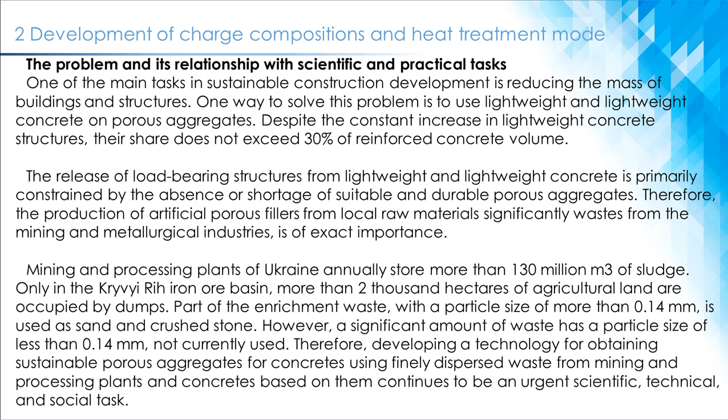Therefore, developing a technology for obtaining sustainable porous aggregates for concretes using finely dispersed waste from mining and processing plants, and concretes based on them, continues to be an urgent scientific, technical, and social task. The research aims to develop optimal compositions of new porous aggregates made from the waste of mining and processing plants and study these aggregates' properties.

The selection of the optimal composition of raw materials for the porous filler included an analysis of the influence of the charge and additives design and their granulometric composition on the final product's quality. Dry mixtures contained crushed and not crushed sludge, grains with a size of 1.25 to 0.14 millimeters; not crushed sludge with the addition of crushed shale; not crushed and crushed sludge with the addition of crushed shale; crushed sludge and crushed shale.

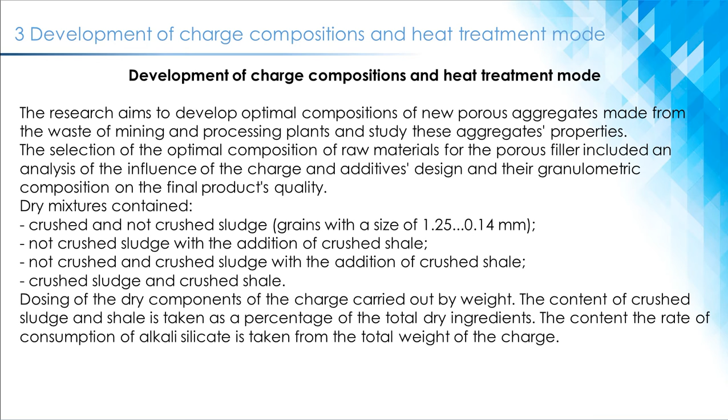Dosing of the dry components of the charge was carried out by weight. The content of crushed sludge and shale is taken as a percentage of the total dry ingredients. The rate of consumption of alkali silicate is taken from the total weight of the charge. The mixture was granulated in a disc granulator until granules with a diameter of 5-20 mm were formed. Liquid glass is fed into the pelletizer by means of a spray gun.

The molding of the raw granules was carried out at different density values of alkali silicate, 1.30 to 1.45 g/cm3, which provided the introduction of the required amount of its solid substance into the charge. This approach made it possible to reveal the pattern and nature of the influence of the consumption of alkali metal silicate on the porous filler's properties.

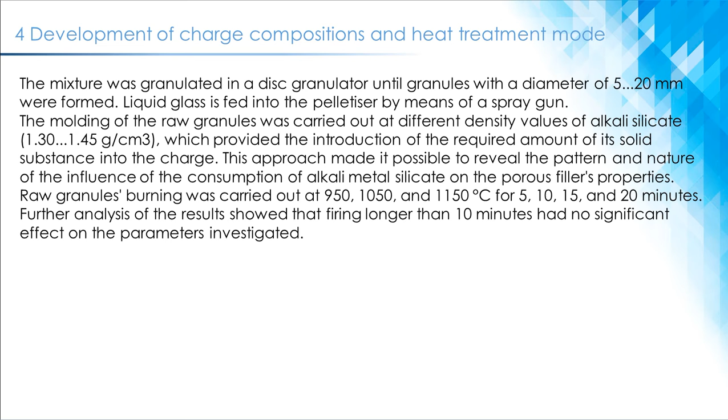Raw granules burning was carried out at 950, 1050, and 1150 degrees Celsius for 5, 10, 15, and 20 minutes. Further analysis of the results showed that firing longer than 10 minutes had no significant effect on the parameters investigated. The burnt granules testing results from a raw mixture with crushed sludge are shown in Fig. 1. The obtained results show that if alkali silicate and the amount of ground sludge in the charge increases, the average density of aggregate granules decreases.

However, it is impossible to obtain an aggregate with an average density of less than 1.5 g/cm3 due to the resulting liquid phase's small amount. The amount of the liquid phase largely depends on the content of fine particles in the mixture. The amount of ground sludge did not exceed 20%, and the larger grains did not take an active part in creating the pyroplastic melt; they dissolved only partially.

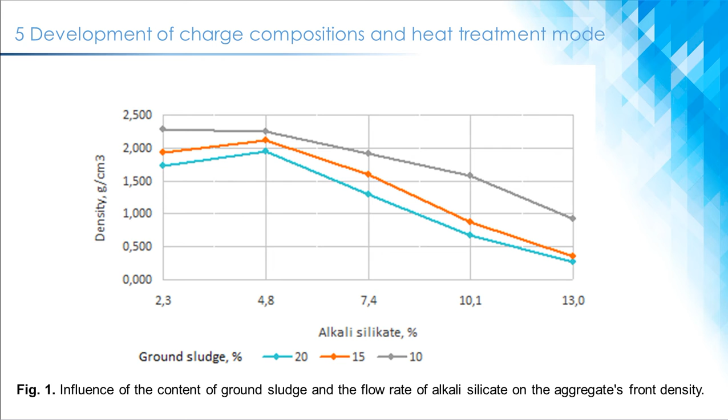Adding a part of crushed shale to the sludge made it possible to obtain an aggregate with a lower average density than in the previous case. This dependence is shown in Fig. 2. A decrease in filler granules average density with the same fraction of the crushed charge occurs due to an increase in the liquid phase amount. This is because liquid glass forms more melting eutectics with shale minerals and more intense gas evolution occurs.

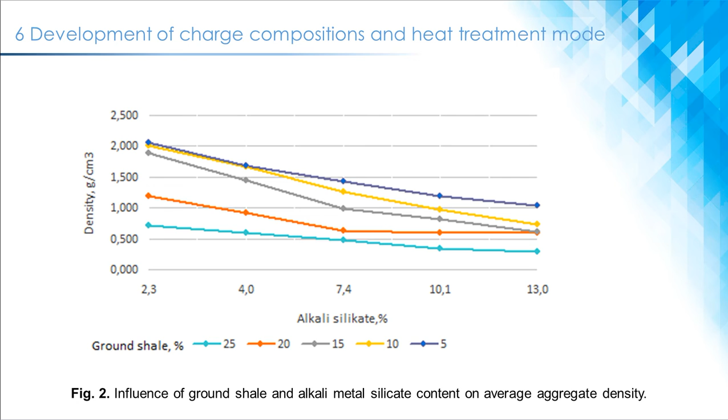Studies have been carried out on the effect of the content of crushed sludge and shale on the aggregate average density. These studies' results are shown in Fig. 3 and show that aggregate granules average density decreases almost linearly with increasing alkali silicate consumption. However, with a 20% content of crushed sludge and shale and alkali silicate consumption of more than 10%, an increase in aggregate granules average density is observed.

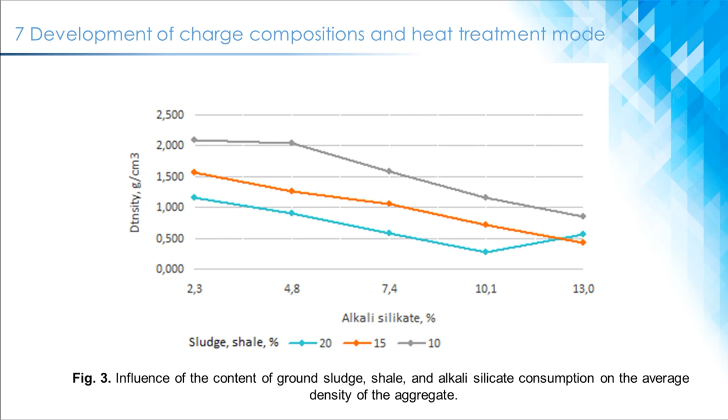This is explained by a decrease in the melt's viscosity and the process of compaction, rather than porization. The combined effect of the milled components on the aggregate granules average density is greater than that of each separately. Previous studies have shown that using a mixture containing unmilled sludge and shale results in low-strength granules with low porosity and high average density. Therefore, all further studies were carried out only on mixtures with ground components.

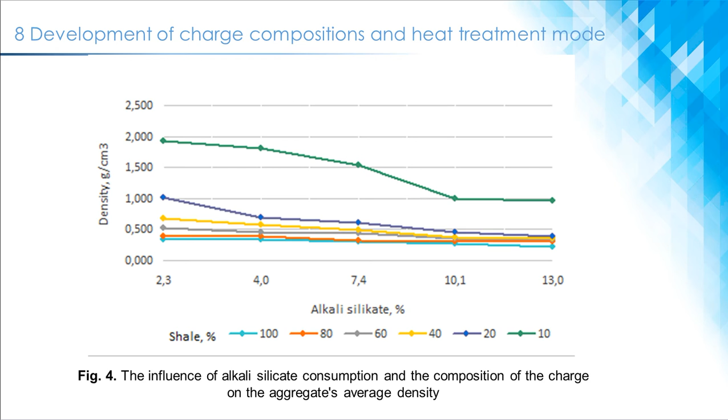The results are shown in figures 4 and 5. Dependencies show that the most intensive decrease in average density occurs when there is up to 40% shale in the charge. A further increase in the shale amount reduces the average density slightly, but the granule strength sharply decreases, and the pores increase due to increased gas release.

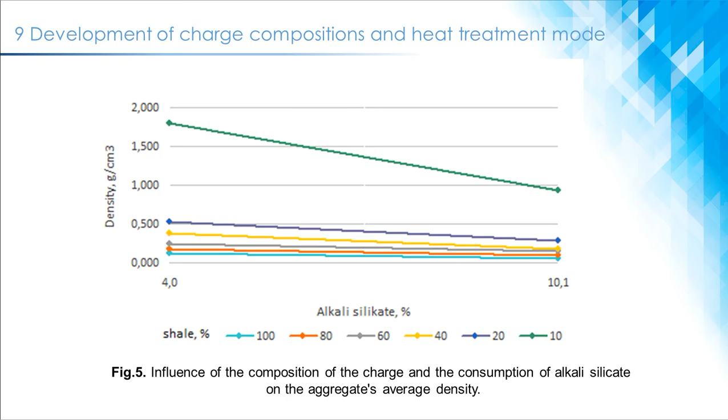Intense and excessive release of gaseous products does not improve the porization process but causes the formation of large interconnected pores, passing into cavities and open pores. Since previous studies have established that the most suitable for obtaining a porous aggregate is a crude mixture consisting of crushed sludge, crushed shale, and water glass, these mixtures have been used to study the influence of technological factors on the properties of the porous aggregate.

The research objective is to obtain mathematical models expressing the aggregate's average density and strength on the leading technological factors. The mathematical planning method, followed by mathematical and statistical processing of the results, was used to reduce the number of experiments. A three-factor experiment at 2 levels is planned in work. The variables are x1, the content of ground shale as % of the total mass of dry components, x2, consumption of liquid glass as % of the total mass of the charge, and firing temperature.

Since firing for more than 10 minutes did not significantly affect the parameters under study, firing the granules was 10 minutes and not taken as a variable. The levels and intervals of variation of the selected factors are shown in Table 1. After statistical analysis, the equations have the following form. When checking the suitability of the above equations by Fisher's criterion, they all became adequate.

Analysis of equations 1 and 2 shows that within the limits of variation of the variables, the burning temperature and shale consumption have the most significant effect on the average density of the aggregate, and the effect of the burning temperature is 6 times greater than the consumption of shale. As the burning temperature and the alkali silicate consumption increase, the strength of the aggregate decreases. Figures 6 and 7 show a graphical interpretation of the obtained dependencies.

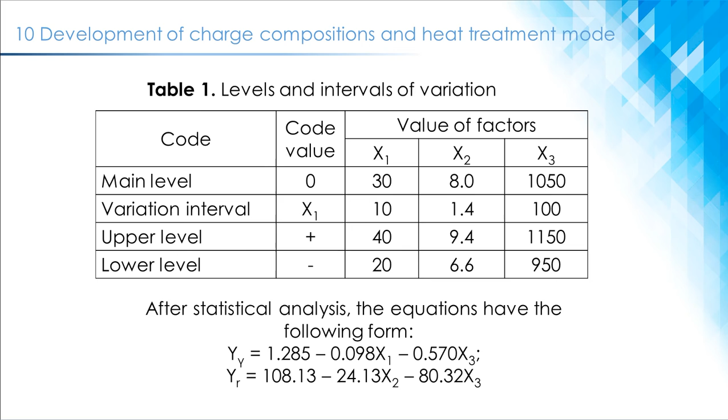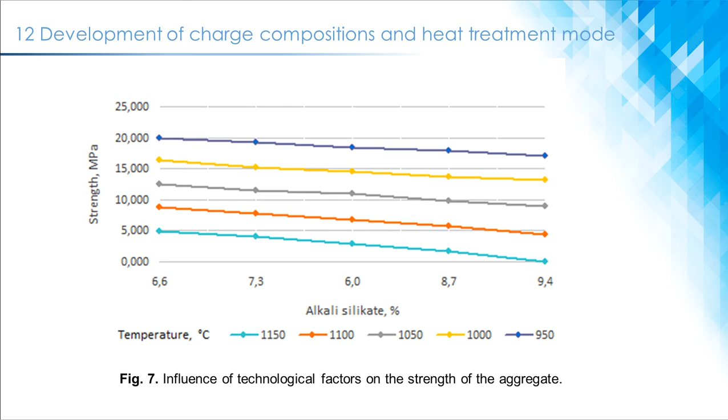Properties of porous waste aggregate. To obtain a complete characterization of a material and to identify its behavior in concrete, detailed studies of its properties, structure, and phase composition are required. The aggregates obtained both in a laboratory and in industrial conditions were subjected to research. The general view of the porous aggregate granules from the MBC wastes is shown in Figure 8.

The samples of the obtained porous aggregates of dark brown color differ little from each other and have a large porous structure with cavities. The pores are generally round, 250-1000 microns in size. The surface of the aggregate is partially melted and differs from the inner layers in its lower porosity. The absence of a dense sintered crust on the new aggregate's surface is expected to increase adhesion to the cement stone, ultimately leading to an increase in concrete strength.

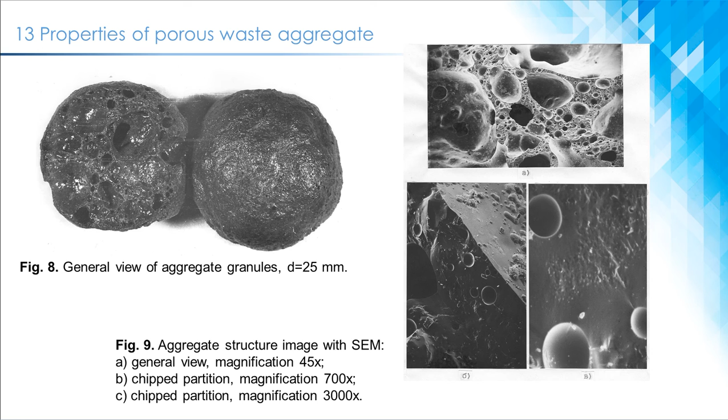The images were taken with a scanning electron microscope, SEM, to show a porous aggregate structure from MBC wastes, Figure 9. There is a different size of porosity of the material. The pores have a smooth surface, and the surface of the chip partitions between the pores is glassy, homogeneous. The nature of pore formation is the peculiarity of the new aggregate structure. This process occurs due to the swelling of the pyroplastic melt. It results in an increase in the original volume due to the release of CO2 from the granules volume.

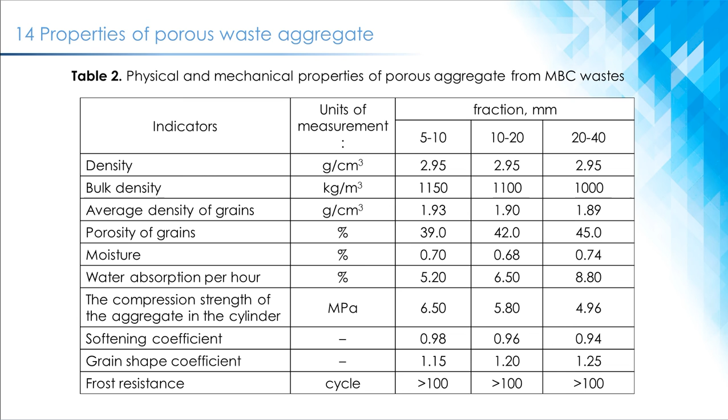An artificial porous aggregate from MBC wastes obtained in experimental industrial conditions was tested. The test results are presented in Table 2. For experimental production of the aggregate, a mixture of mining waste and oil shale in the ratio of 4:1 by weight, liquid glass consumption of 8% of the mass of dry components and firing temperature of 1100 degrees Celsius for 15 minutes was used. As Table 2 shows, the tested aggregate meets the requirements of GOST 9757-90 and belongs to the highest quality category.

A cement stone's contact zone with a large porous aggregate, Figure 10, has the form of a winding line exactly repeating the granule relief, providing a tight and robust contact. The micro-hardness measurement method was used to study the micro-strength properties of the contact zone. The results have shown that the micro-hardness of the aggregate, 9,000-11,000 MPa, exceeds the micro-hardness of the cement stone in the contact zone, 4,000-6,000 MPa, and the micro-hardness of the contact zone is higher than that of the cement stone in the intergranular space, 1,500-2,000 MPa.

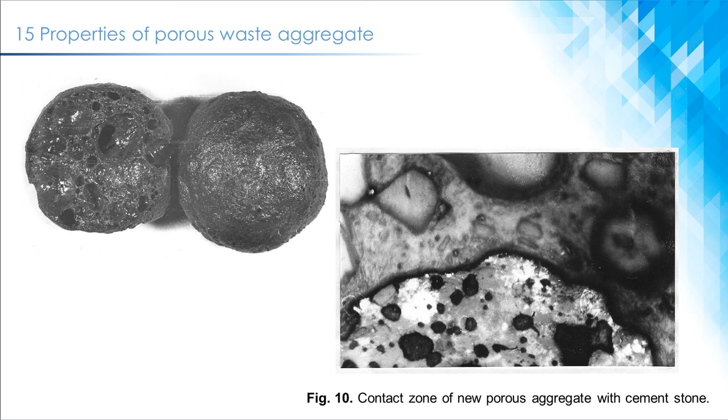Conclusions. To obtain a porous filler, the most optimal are raw mixtures containing 20–40% shale and 6–10% liquid glass, fired at a temperature of 950–1150 degrees C. Mathematical models have been obtained that reflect the influence of technological factors on the volume, density, and strength of porous aggregates from the waste of mining and processing plants. The physical and mechanical properties of the obtained porous filler, characterized by high mechanical strength, have been determined. The filler meets the requirements of the standards and belongs to the highest quality category.

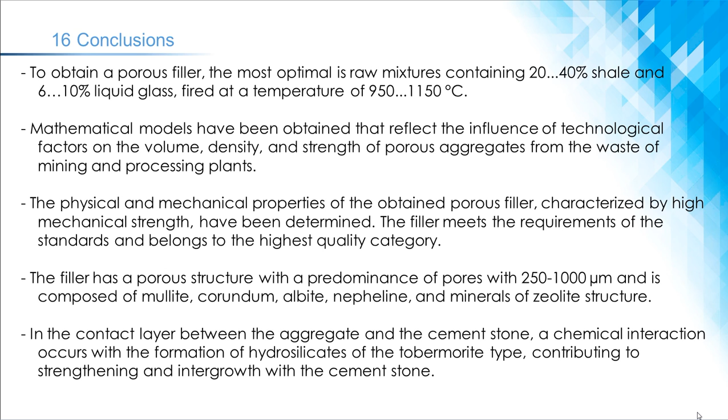The filler has a porous structure with a predominance of pores of 250–1000 microns and is composed of mullite, corundum, albite, nepheline, and minerals of zeolite structure. In the contact layer between the aggregate and the cement stone, a chemical interaction occurs with the formation of hydrosilicates of the tobermorite type, contributing to strengthening and intergrowth with the cement stone.